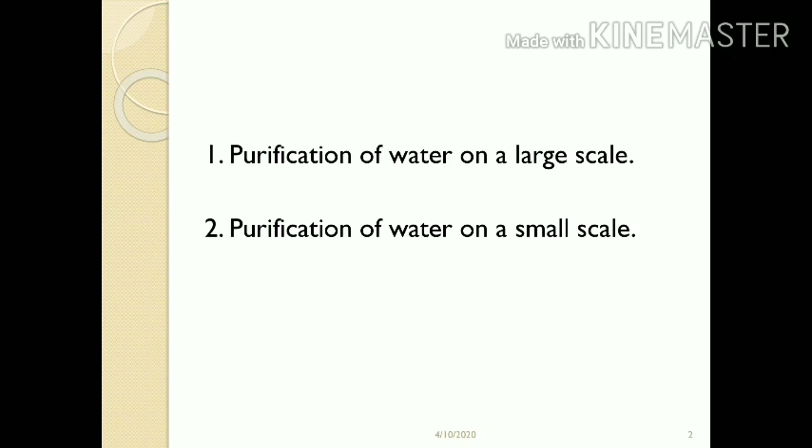Purification of water is of great importance in public health. It may be considered under two headings: purification of water on a large scale, and purification of water on a small scale. Today I will be discussing purification of water on a large scale.

The purpose of water treatment is to produce water that is safe and wholesome. The method of treatment to be employed depends upon the nature of the raw water and the desired standards of water quality. For example, groundwater or borewell water may not need intense treatment, and may need only some disinfection.

If it is surface water like river water or lake water, this requires extensive treatment as it is turbid and highly polluted. The components of a typical water purification system comprise one or more of the following steps: storage, filtration, and disinfection.

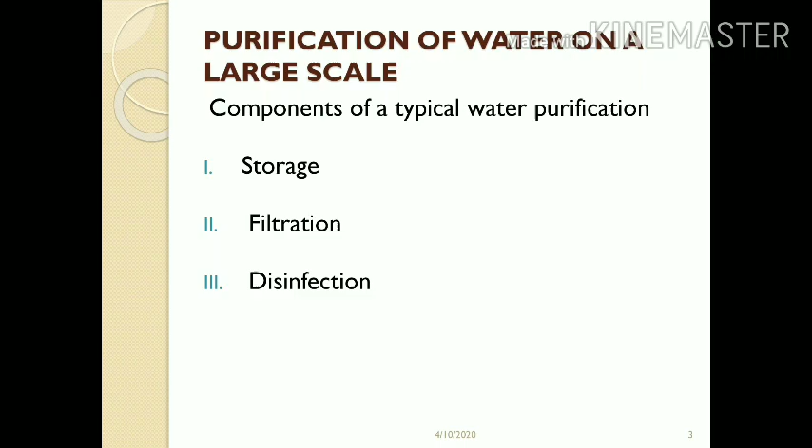The first step is storage. Water is drawn from the source, maybe a river or a lake, and impounded in natural or artificial reservoirs. Storage provides a reserve of water from which further pollution is excluded. The water is drawn and stored.

As a result of storage, a considerable amount of purification takes place, and this is natural purification. We may look at it from three points of view. The first is physical: by mere storage, the quality of water will improve, and about 90% of the suspended impurities will settle down in one day by the force of gravitation. The water becomes clearer, which allows penetration of light, and reduces the work of the filters.

The second point is chemical purification. Certain chemical changes also take place during storage. The aerobic bacteria oxidize the organic matter present in the water with the help of dissolved oxygen. As a result, the content of free ammonia is reduced and a rise in nitrate occurs.

The third effect of storage is biological. A tremendous drop takes place in bacteria count during storage. The pathogenic bacteria gradually die out, and it is found that when river water is stored for 5 to 7 days, 90% of the bacteria is reduced, and this is one of the greatest benefits of storage.

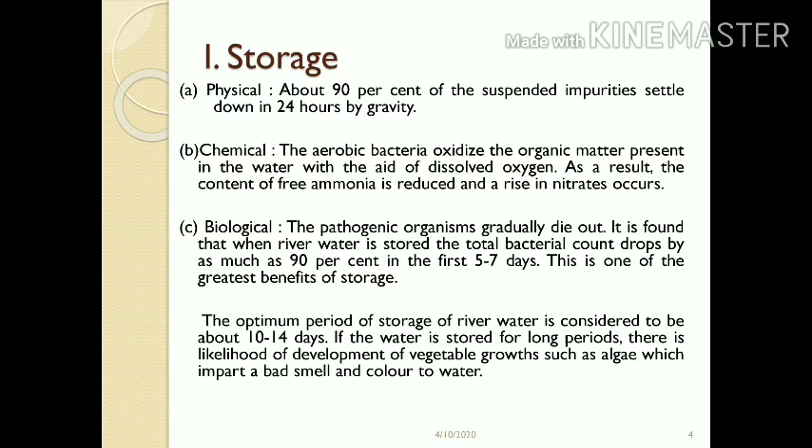Coming to the next slide, filtration. Filtration is the second stage in the purification of water, and quite an important stage, because 98 to 99% of the bacteria are removed by filtration, apart from other impurities.

Two types of filtration are in use: biological, which is called slow sand filters, and the second one is rapid sand filter, which is also called mechanical sand filter.

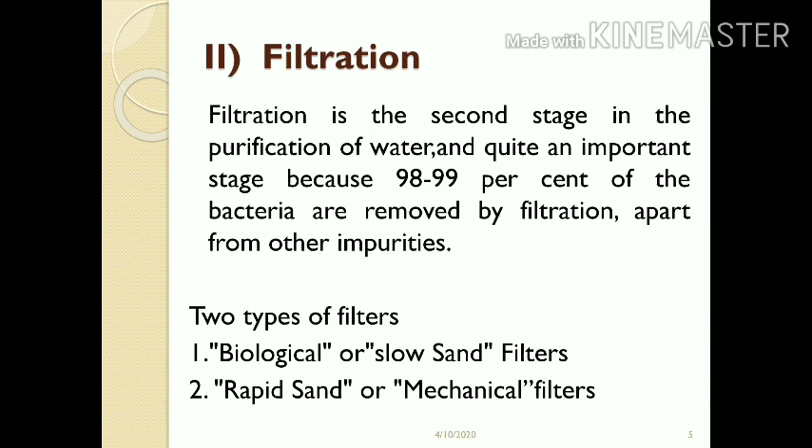Slow sand or biological filters, given in the sixth slide. This slow sand filter was first used for water treatment in 1804 in Scotland, and subsequently adopted in London. During the 19th century their use spread throughout the world, and even today they are generally accepted as a standard method of water purification.

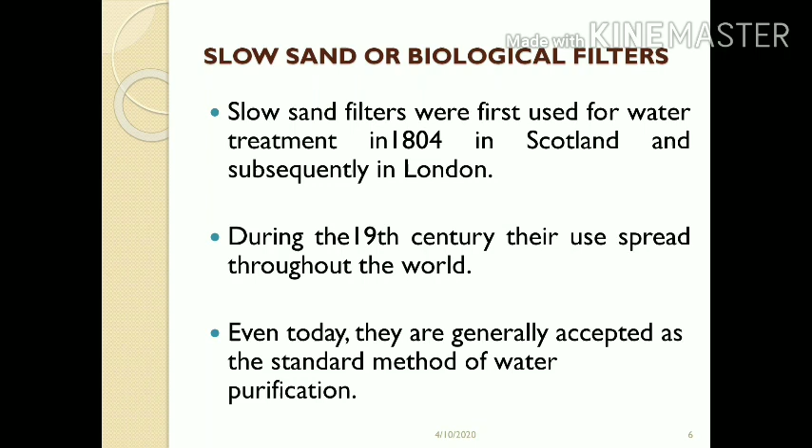Coming to the next slide, here I have given the elements of slow sand filters. There are four elements: the first is supernatant raw water, which stands on the bed of graded sand, which is the second component. The third component is an under-drainage system, and the fourth component is a system of filter control valves.

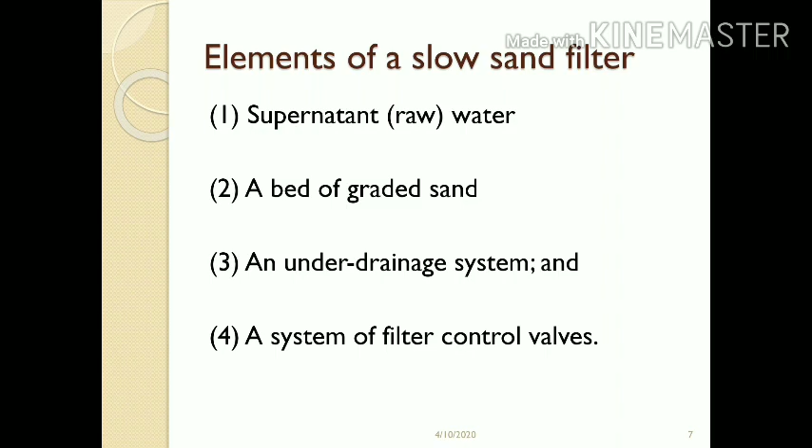In the next slide, I have given the slow sand filter image, showing how exactly it will be. The raw water will be supported by the sand bed, giving continuous pressure. The different parts of this slow sand filter are labeled with codes A, B, C up to J. Please go through.

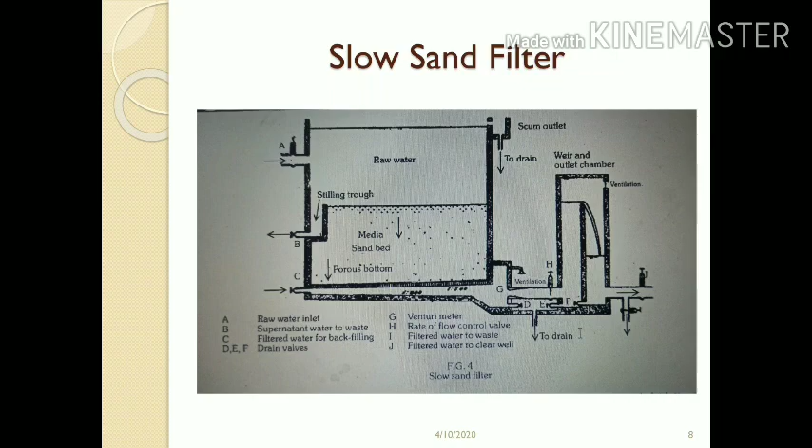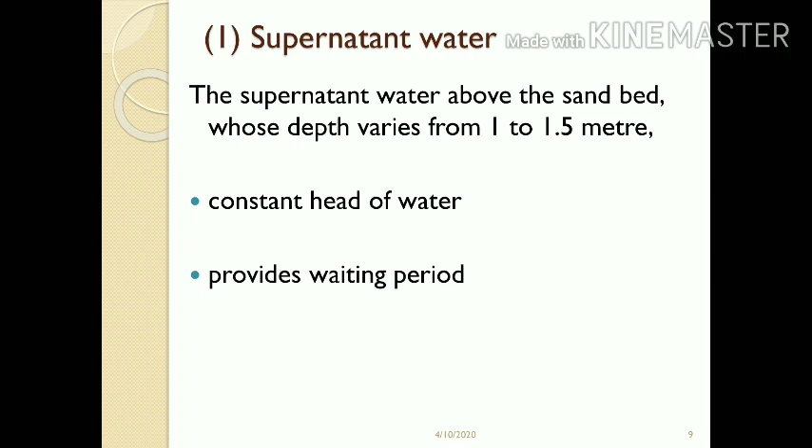Coming to the next slide, the sand bed, the most important part of the filter. The thickness of the sand bed is about 1 meter, and sand grains are carefully chosen so that they are preferably rounded and have an effective diameter between 0.2 to 0.3 millimeter. The sand should be clean and free from clay and organic matter. The sand is supported by a layer of graded gravel, 30 to 40 centimeters deep, which also prevents fine grains from being carried into the drainage pipes.

The sand bed provides a vast surface area. One cubic meter of filter sand provides about 15,000 square meters of surface area. The water percolates through the sand bed very slowly, a process taking 2 hours or more, and in doing so it is subjected to purification processes like mechanical straining, sedimentation, adsorption, oxidation, and bacterial action, all playing their part. The designed rate of filtration normally lies between 0.1 to 0.4 cubic meter per hour per square meter of the sand bed.

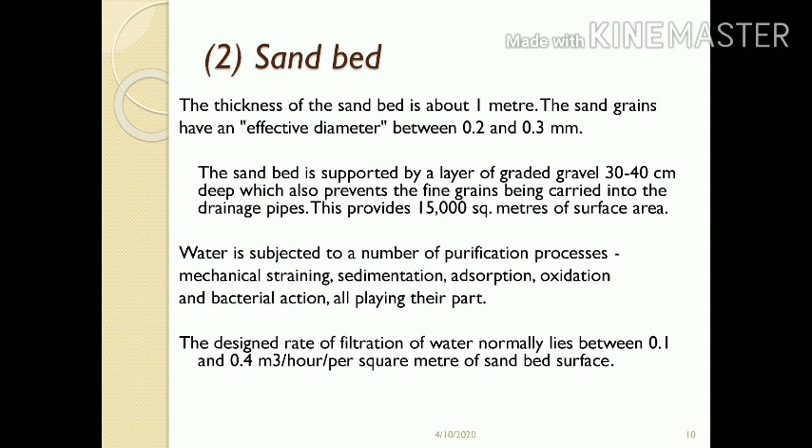Coming to the next slide, explanation of the vital layer. When the filter bed is newly laid, it acts merely as a physical strainer and cannot truly be called a biological filter. But within a few days, the surface of the sand bed gets converted into a slimy growth layer called schmutzdecke, also called the vital layer, zoogleal layer, or biological layer. This layer is slimy and gelatinous, consisting of thread-like algae and numerous forms of life including plankton, diatoms, and bacteria. The formation of this vital layer is called ripening of the filter.

It may take several days for the vital layer to form fully, and when fully formed it extends 2 to 3 centimeters into the top portion of the sand bed. The vital layer is called the heart of the slow sand filter because it is this layer which filters out all the bacteria that pass through the sand filter.

It may remove organic matter, hold back bacteria, and oxidize ammoniacal nitrogen into nitrate, helping to yield bacteria-free water. Until the vital layer is fully formed, the filtrate from the first few days is usually run to waste, since bacteria may still be present.

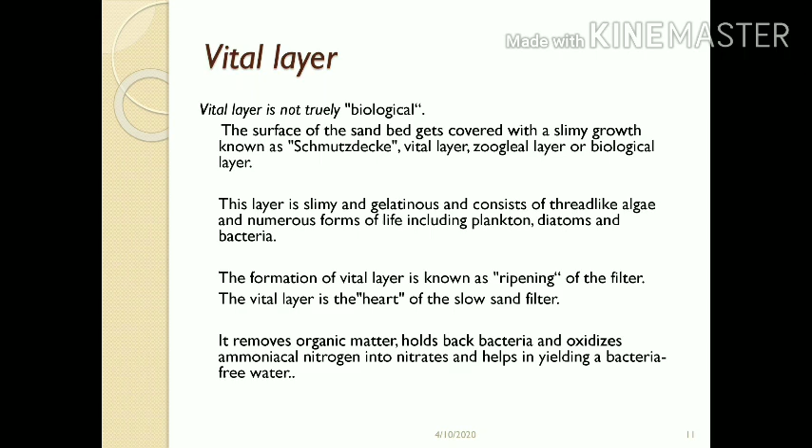Coming to the 12th slide, the under drainage system. At the bottom of the filter bed, there is an under drainage system. It consists of porous or perforated pipes which serve a dual purpose: one, providing support to the sand filter, and second, providing an outlet for the filtered water. Once the filter bed has been laid, the under drainage system cannot be seen.

Filter box. The first three elements, that is supernatant water, sand bed, and under drainage system, are contained in a filter box. The filter box is an open, rectangular box, sized 2.5 to 4 meters deep, built wholly or partially below the ground, with walls made of stone, brick, or cement. From top to bottom, the filter box consists of supernatant water of 1 to 1.5 meters, sand bed of 1.2 meter, gravel support of 0.3 meter, and filter bottom of 0.16 meter.

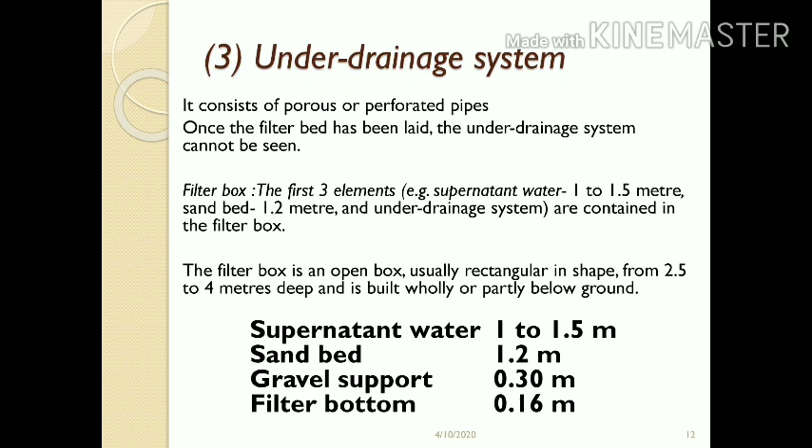In slide number 13, I have given an image depicting the sections of the filter bed. In the upper portion, the filter sand is very fine, ranging from 0.2 to 0.3 millimeter, followed by coarse sand, then fine gravel, and then coarse gravel. The perforated pipes are shown, which allow the water to move to the next section of the filter.

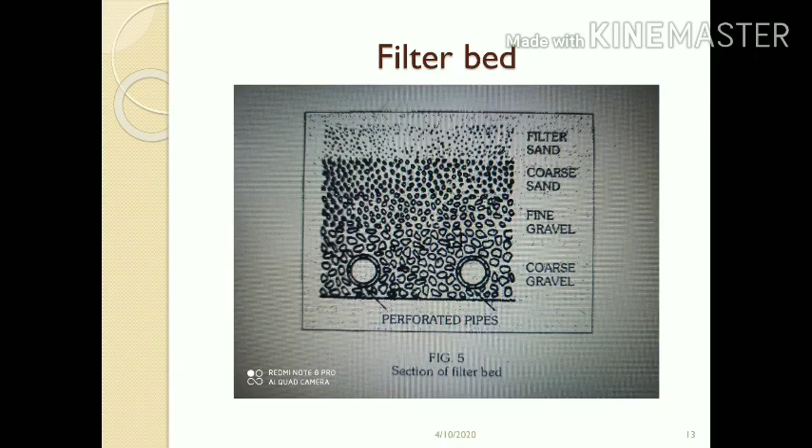When the resistance builds up, the operator opens the regulating valve so that a constant pressure is maintained, and when the loss of head exceeds 1.3 meters, it is uneconomical to run the filter.

Filter cleaning: how is this filter cleaned? Normally the filter may run for weeks or even months without cleaning, and when the bed resistance increases to such an extent that the regulating valve has to be kept fully open, it is time to clean the filter beds. Since any further increase in resistance is bound to reduce the filtration rate, at this stage the supernatant water is drained off and the sand bed is cleaned by scraping off the top portion of the sand layer to a depth of 1 to 2 centimeters.

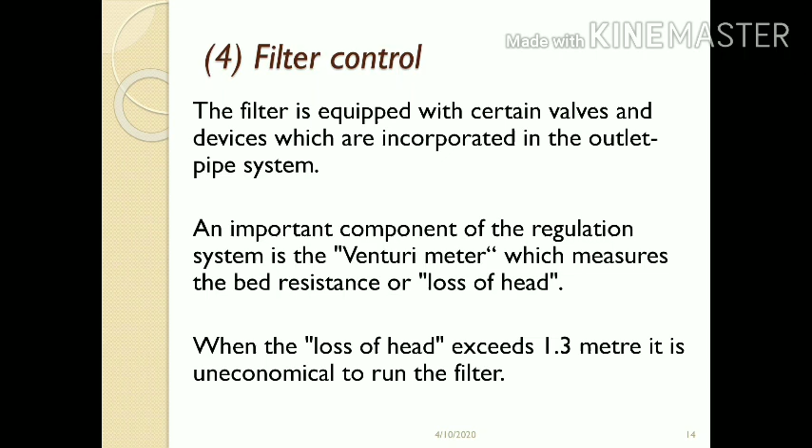The operation may be carried out by unskilled laborers using hand tools or by mechanical equipment. After several years of operation, say 20 to 30 scrapings, the thickness of the sand bed will have reduced to about 0.5 to 0.8 meters. Then the plant is to be closed down and a new bed is to be constructed.

Coming to the next slide, the advantages of slow sand filters. The first is that it is simpler than the rapid sand filter, and the cost of construction is cheaper. Third, the physical, chemical and bacteriological quality of the water is very high, and when working ideally, slow sand filters have been shown to reduce total bacterial count by 99.9 to 99.99% and E. coli count by 99 to 99.9%.

In recent years, a mistaken idea has grown that biological filters or slow sand filters are an old-fashioned and outdated method of water treatment, which has been completely superseded by rapid sand filters. So many countries have now adopted rapid sand filters.

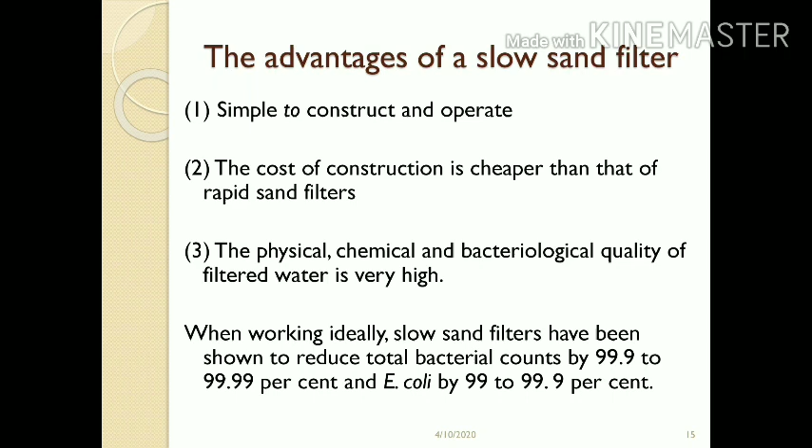Let me go to the next slide, that is rapid sand filters. Rapid sand filters are also called mechanical filters. In 1885, the first rapid sand filters were installed in the USA, and since that time they have gained considerable popularity, especially in highly industrialized countries.

Rapid sand filters are of two types: gravity type, for example Paterson filters, and pressure type, for example Candy filters. Both types are in use, and the following steps are involved in purification of water by rapid sand filters. Let me go to the next slide.

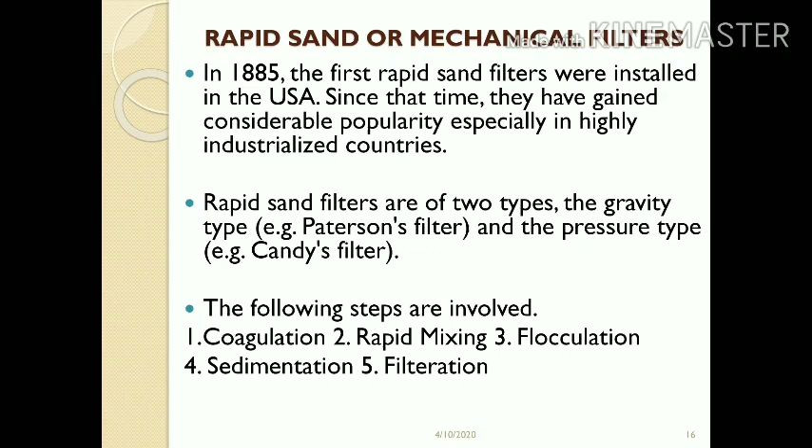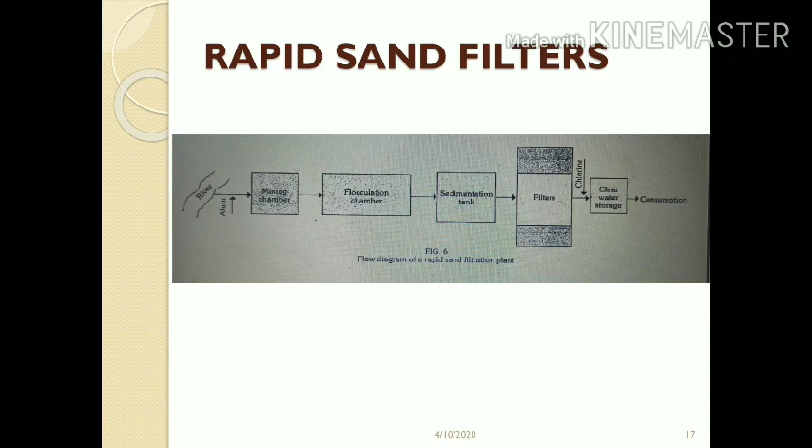Coming to the next slide, the first step is coagulation. The raw water is first treated with a chemical coagulant such as alum, which is a good coagulant agent, the dose of which varies from 5 to 40 milligrams, and sometimes more, because if the turbidity of the water is higher, you have to apply more alum.

The next step is rapid mixing. The treated water is then subjected to violent agitation in a mixing chamber for a few minutes. This allows a quick and thorough mixing of alum throughout the bulk of the water, which is very necessary.

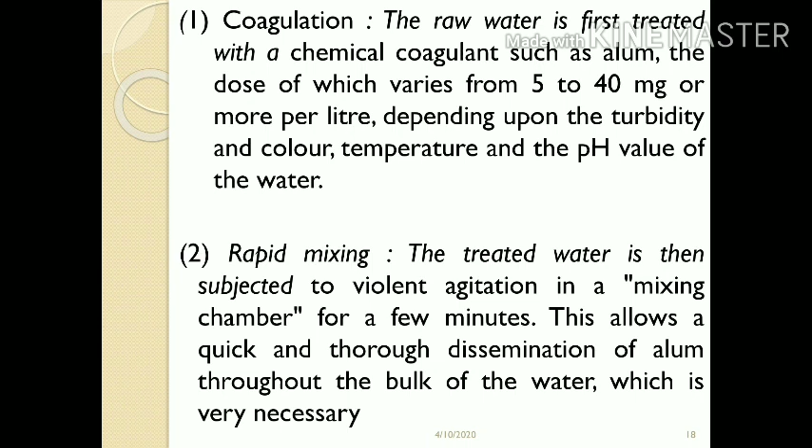Coming to the next slide, flocculation. The next phase involves slow and gentle stirring of the treated water in a flocculation chamber for about 30 minutes. The mechanical type of flocculator is most widely used. It consists of a number of paddles which rotate at 2 to 4 rounds per minute.

The paddles rotate with the help of motors, and this slow and gentle stirring of the water results in the formation of a thick, copious, white flocculant precipitate of aluminum hydroxide. The thicker the precipitate or floc diameter, the greater will be the settling velocity.

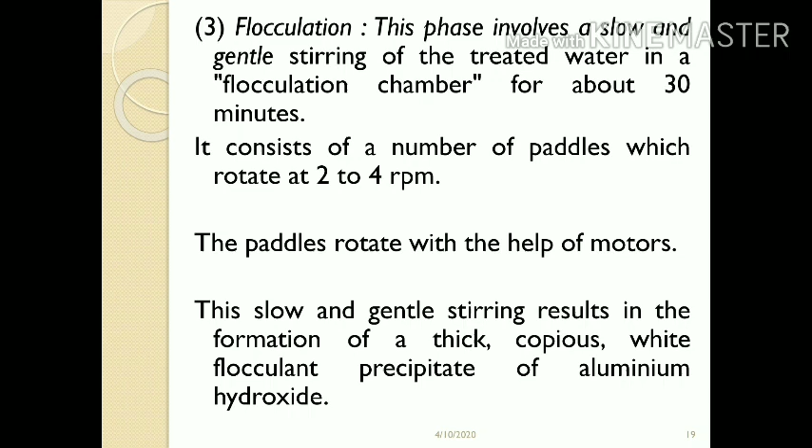The coagulated water is now led to a sedimentation tank, where it is detained for 2 to 6 hours, and the flocculant precipitate together with impurities and bacteria settle down. At least 95% of the flocculant precipitate needs to be removed before the water is admitted into the rapid sand filters. These precipitated solids are removed from the sedimentation tank from time to time without disturbing the operation of the tank. For proper maintenance, the tanks should be cleaned regularly, otherwise they may become breeding grounds for mollusks or sponges.

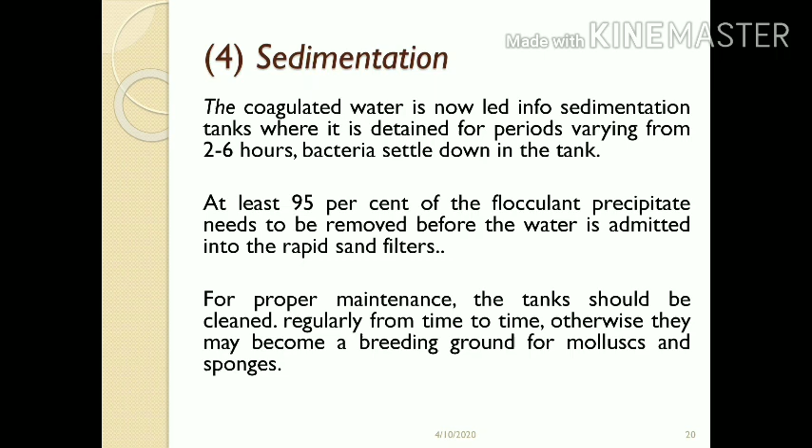The fifth step is filtration. Let us move to the next slide. Filter beds: each unit of the filter bed has a surface of 80 to 90 square meters, say about 900 square feet, and sand is the filter medium.

The effective size of sand particle here in the rapid sand filter is 0.4 to 0.7 millimeter. The depth of the sand bed is usually about 1 meter, that is 2.5 to 3 feet. Below the sand bed is a layer of graded gravel, 30 to 40 centimeters, about 1 to 1.5 feet deep. The gravel supports the sand bed and permits the filtered water to move freely towards the under drain. The depth of the water on top of the sand bed is 1 to 1.5 meters, about 5 to 6 feet. The under drain at the bottom of the filter bed collects the filtered water.

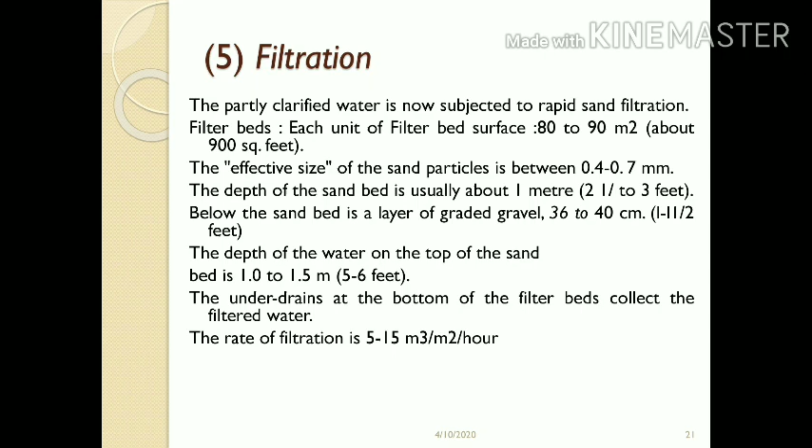The rate of filtration in rapid sand filtration is 5 to 15 cubic meters per square meter per hour. In the next slide, slide number 22, I have given a view of a rapid sand filter image, showing how rapid sand filters exactly look.

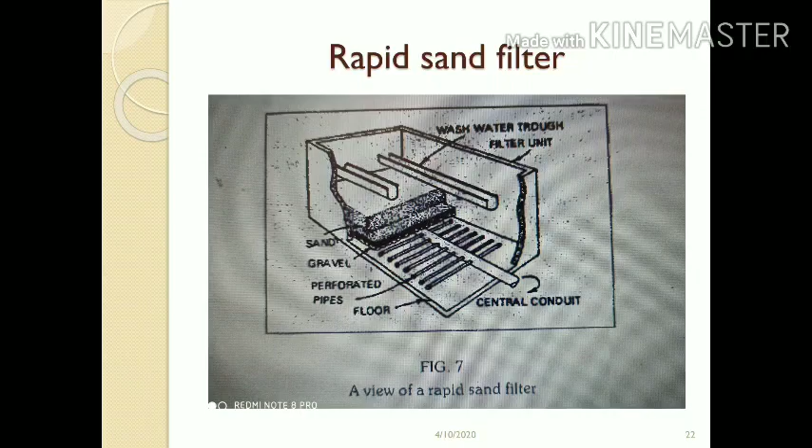Coming to the next slide on filtration: as filtration proceeds, the alum floc not removed by sedimentation is held back in the sand bed. It forms a slimy layer comparable to the Schmutzdecke layer discussed in slow sand filters. It adsorbs bacteria from water and effects purification. Oxidation of ammonia also takes place during the passage of water through the filters. As filtration proceeds, the suspended impurities and bacteria clog the filters, and the filters soon become dirty.

The filters soon become dirty and begin to lose their efficiency. When the loss of head approaches 7 to 8 feet, filtration is stopped and the filters are subjected to a washing process called backwashing. In slow sand filters, when the filters are saturated, they are cleaned by scrubbing; here, a process called backwashing is adopted, where the water movement is made to flow in a reverse direction.

In rapid sand filtration, water is made to move in a reverse fashion. The washing is stopped when clear sand is visible and the wash water is sufficiently clear. The whole washing process takes about 15 minutes, and in some rapid sand filters, compressed air is used as part of the backwashing process.

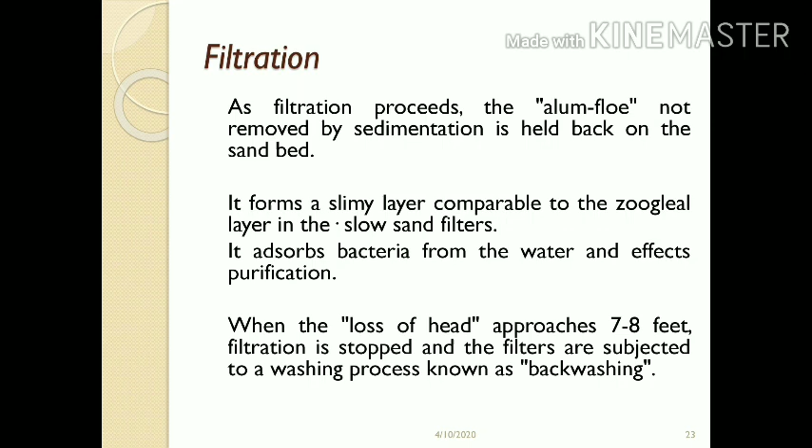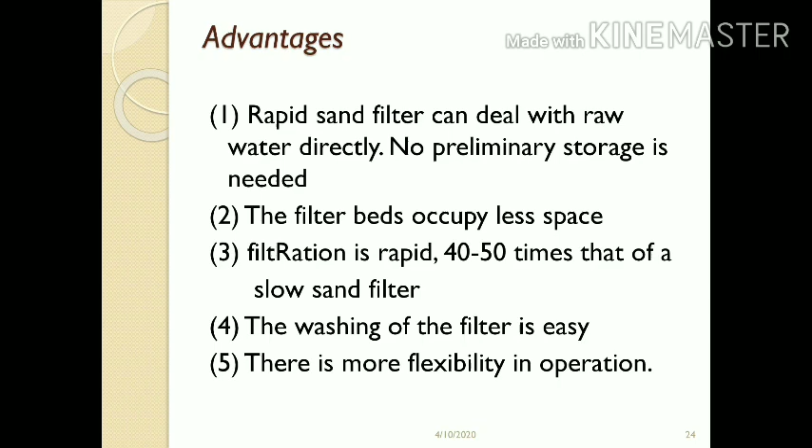The second advantage is that filter beds occupy less space. The third advantage is that filtration is rapid, 40 to 50 times better than slow sand filters, and the washing of the filter is very easy. It is completely flexible, more flexible in operation.

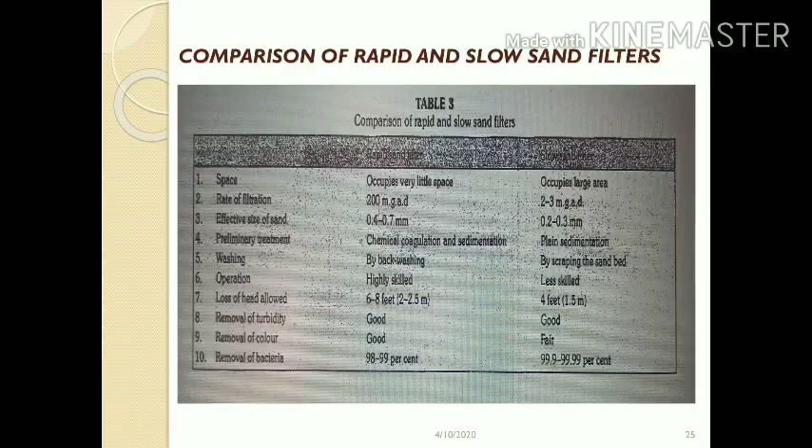And now I am completing this topic of purification of water on a large scale basis. Thank you one and all.